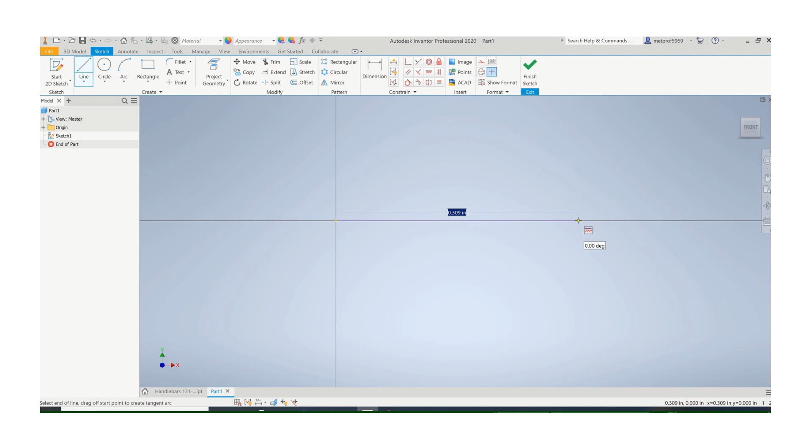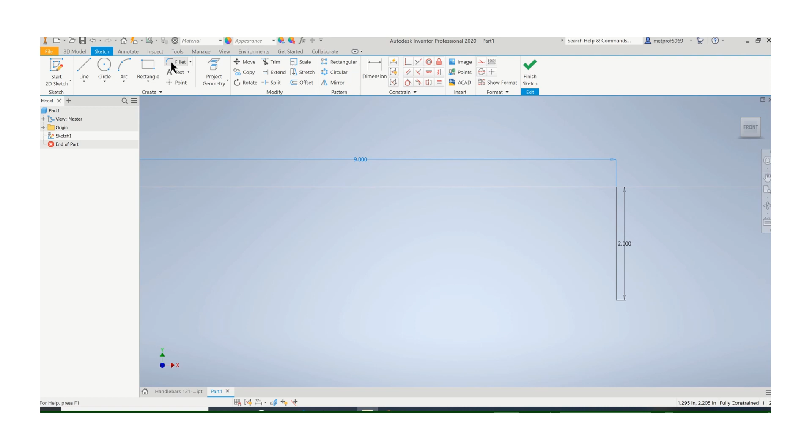And then I'm going to come out 2 inches, and I'll show you what I'm doing here. Let's get that out of the way. Now I've got a bend on this, so again, always put the bends on your path before you extrude it. And let's do a 1.5-inch radius on that.

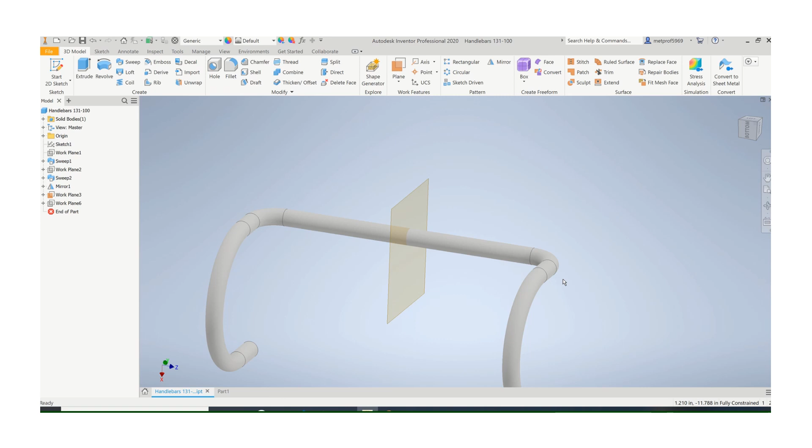Okay, so see what I have so far, and let me show you what I'm doing. Here's the center. I'm starting here at the midpoint because this is symmetrical, so I'm just going to draw one part. I'm going to come up here, go around this bend, and now this length right here, I can't do the full length because I want to do another sweep that comes around this curve.

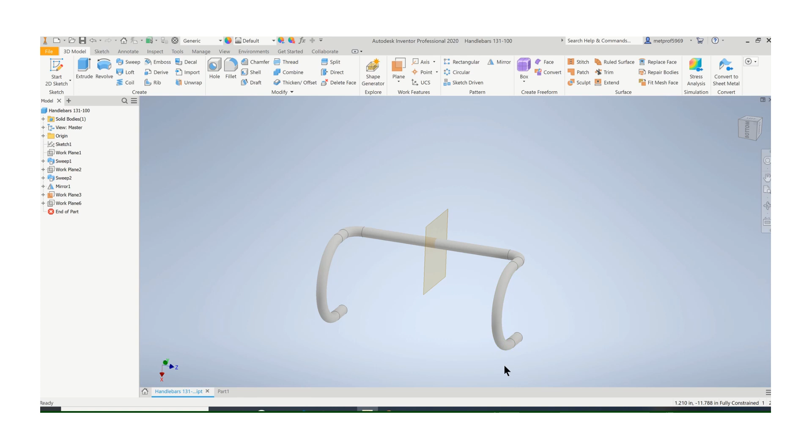Remember, you cannot start a sweep on the curve, so I'm going to just come part way through this straight section. Then on my next sketch, I'll do the rest of the straight section and then the curve. So I'm just going to stop right there, finish the sketch.

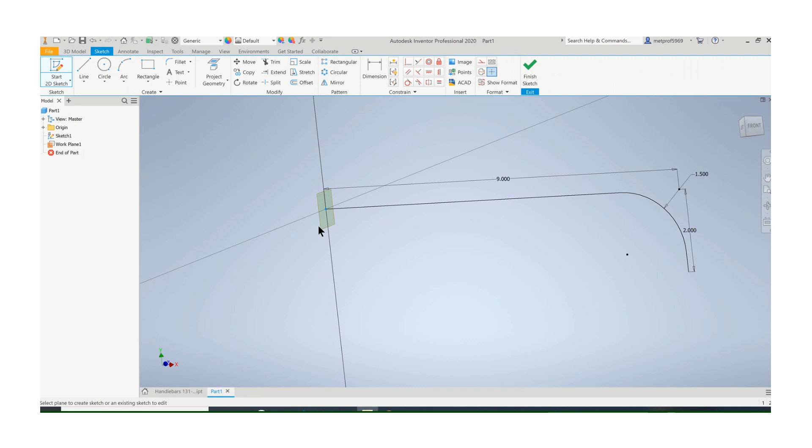Now I want to draw my cross section of the tubing. Again, I'll need a plane on the endpoint, so click on the endpoint and click on the path. And then we'll do a sketch on that plane right there.

And this will be my cross section of the tube, which is 1-inch OD, 0.875 inch ID.

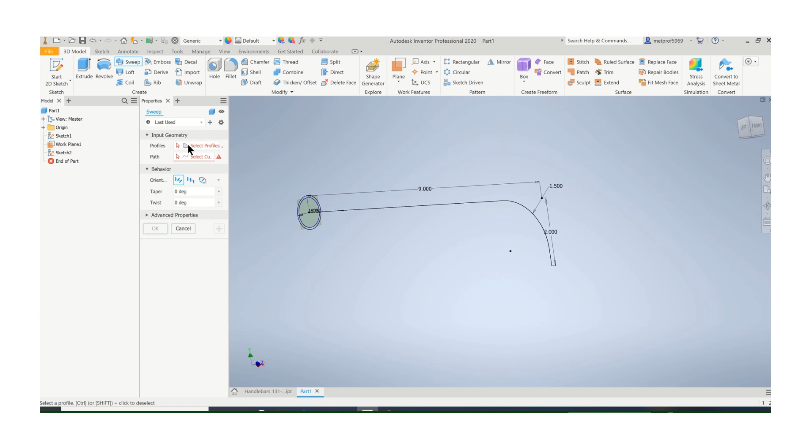And now we'll do a sweep. You just select the profile, which we've seen this before. It doesn't, sometimes it doesn't want to. There we go. Profile, and then click on the path. It'll sweep it.

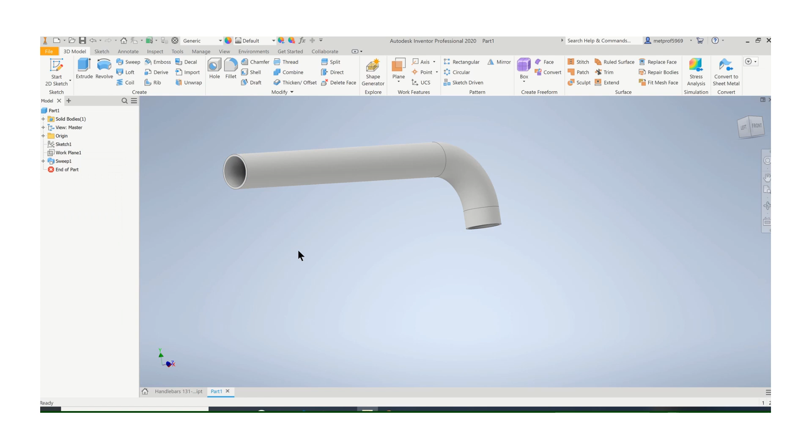So there's that part. Say okay. Now I want to go around the bend here. Let's hide that plane there. So I'm going to have a little straight section and then a curve, but it's in a different orientation.

So let's find a plane that we need. That's the one I need, except I need it offset over to there. So just do an offset plane. And I know that distance is 9 inches.

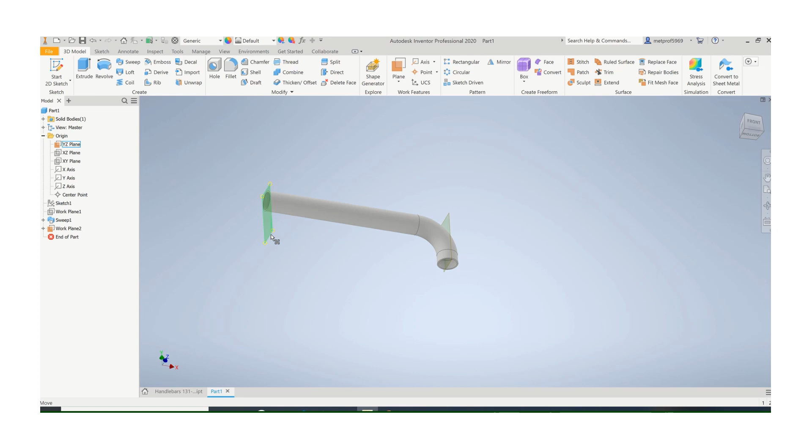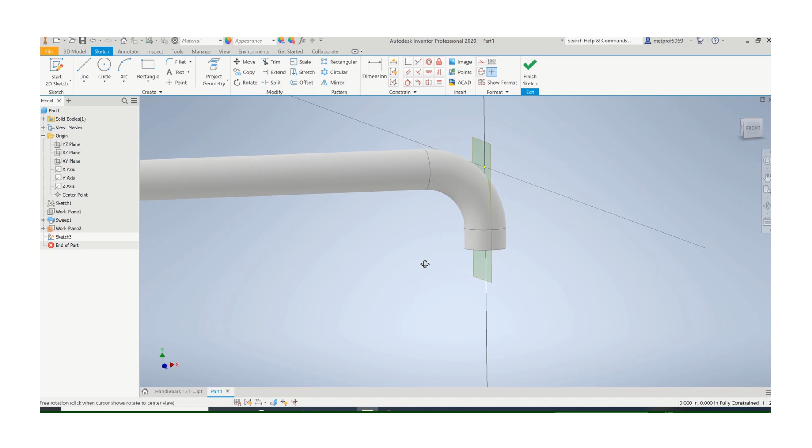So I want to make a sketch on there. Now if you want to make these planes bigger, you can always make them larger. Let's hide that one. And I'm going to make a new sketch on that plane there. Now let's make sure we got our orientation flipped around backwards, so I'm going to do this because I'd rather be on this side.

If I click on the square thing over, okay. So now I need to do a path. Now make sure you're on the center there so that everything's lined up.

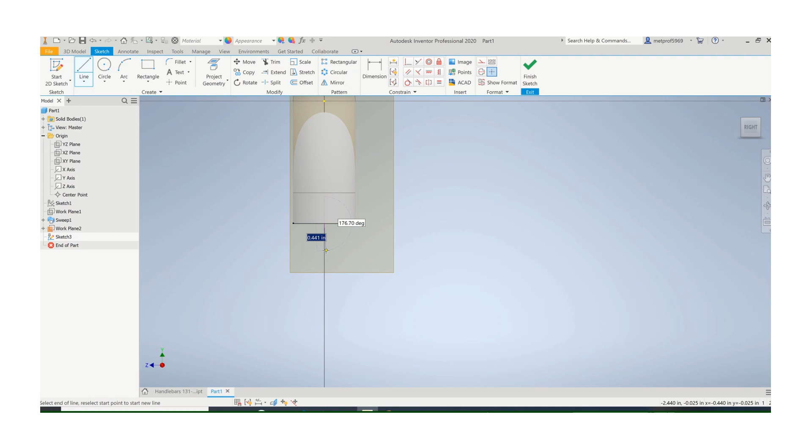You'll see it turn green. And I need to come down another inch. And then I'm going to have that curve, and the edge of the curve is going to be right there.

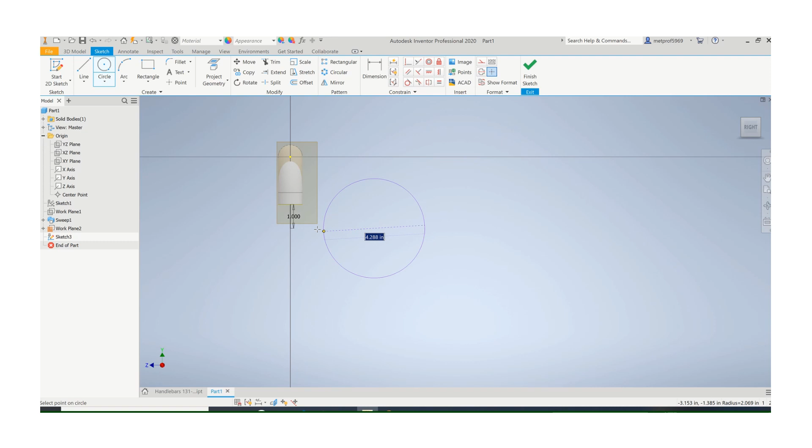So what you can do is just draw, let's see, find that end point and then come over, come straight over, and then just draw a circle. We don't care how big it is, and make sure it touches on that end point there. And then we'll dimension this circle. That's the easiest way to do that.

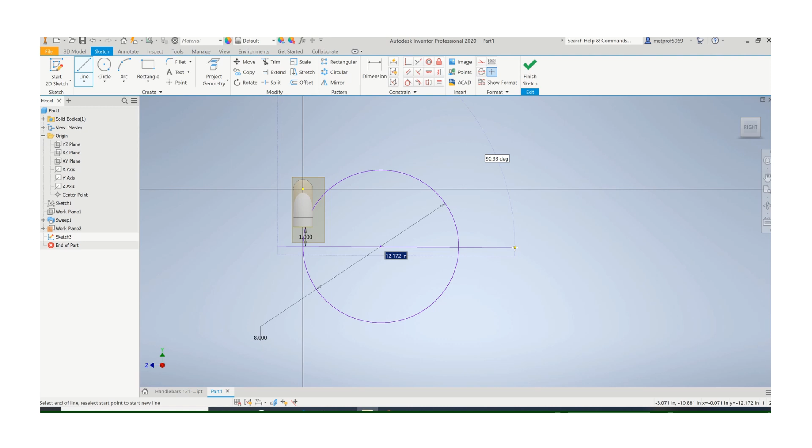And we know that that is an 8-inch diameter circle. And we also need, I'm going to trim this anyway, but I'm going to need a line across here as a trimming tool, but also as just kind of a reference. So easy enough just to, I say that, but let's make sure we get it.

Excuse me, let's make sure we get this on there. Make sure it's horizontal. Extend that over, okay. Because I also have then a straight section of the handlebar that comes off of this right here at the quadrant, and that's going to be a 2-inch long piece right there.

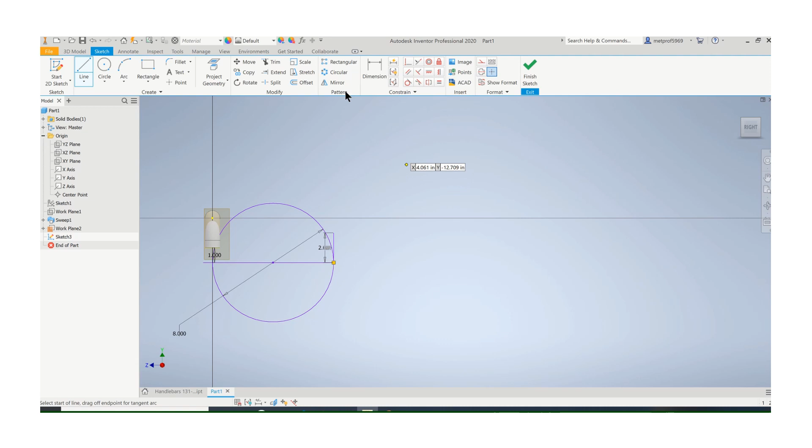And let's trim this away, get rid of those lines right there, and let's deal with that. There we go. I think we're good. Let's finish the sketch and see what we have.

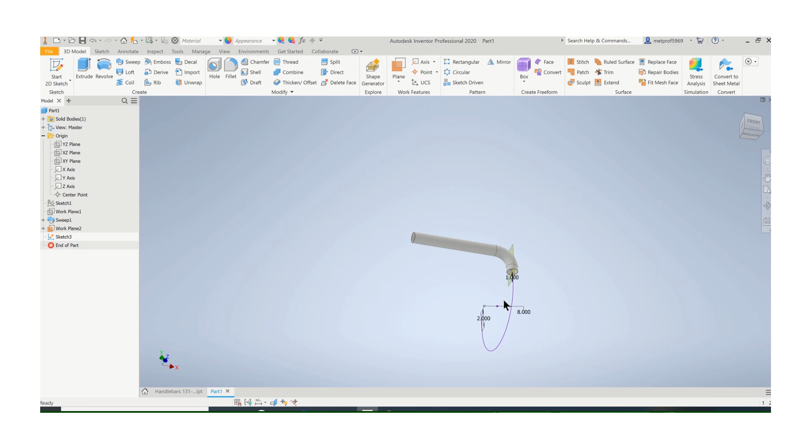So hopefully that makes sense to you. See how I've created that curve portion. Now again, I had to go a little bit of a straight section, so I just did a 1-inch straight section, then the curve, and then the other, that's the end of the handlebar that way.

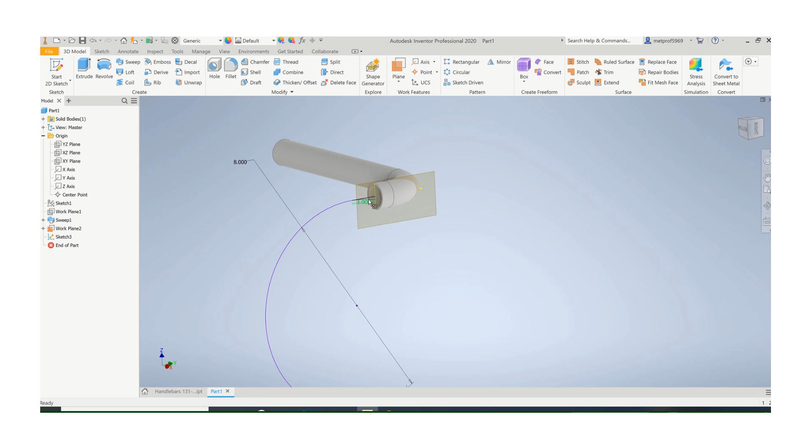Now I'll need to do the cross section of that to do the sweep. Now I can either draw it. Oh, I see that. That's why. Let's go back there. That's why that was still purple. I need to trim that little part of the curve off there. Still purple, but I think everything else is okay.

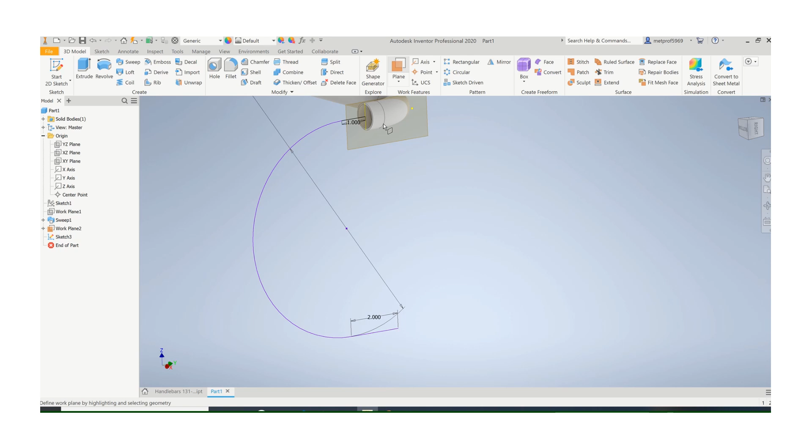All right, so I need the cross section to do the sweep. So let's just put a plane on the endpoint. Remember, click on the endpoint and then click on the path itself. That'll give you that plane on the end. We'll create a new sketch on there.

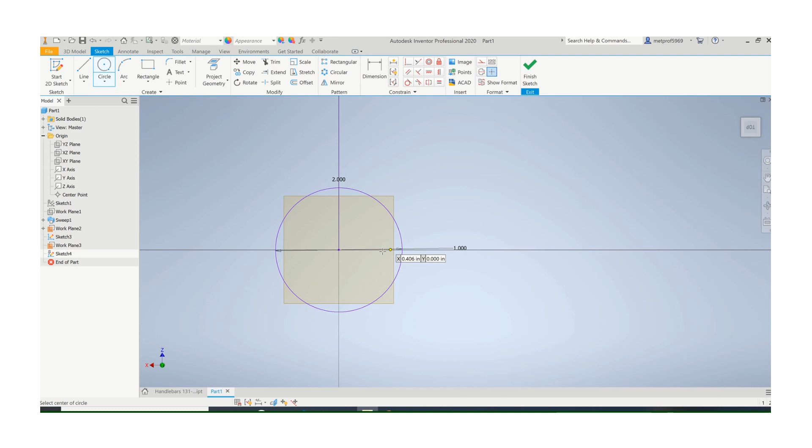And these are easy enough. They're just 2 concentric circles, 1-inch OD, 0.875 ID. Finish the sketch, and then I'll go to sweep.

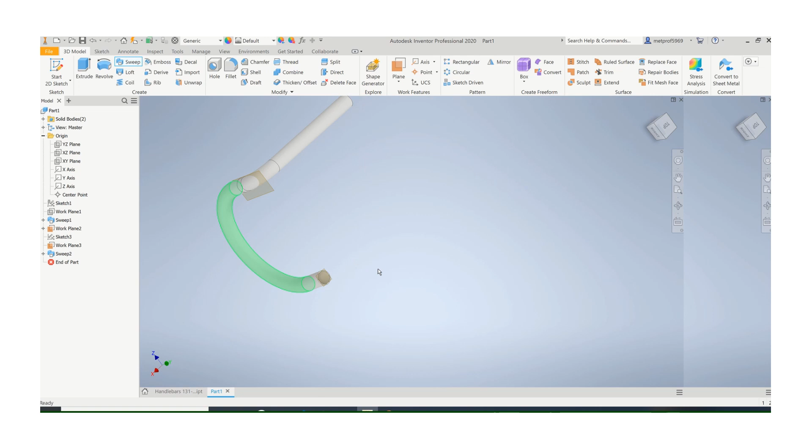Choose the cross section, and then choose the path, and it'll sweep it up to there. Don't worry about that message. Let's see what we've got. So let's hide those planes there. I don't need those anymore.

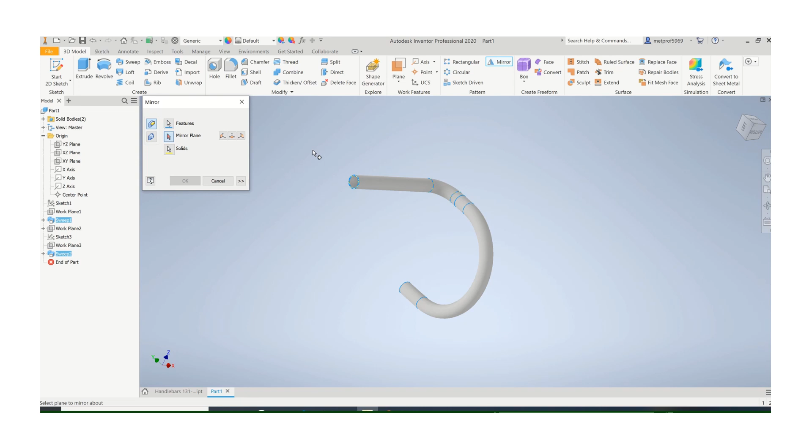So that's half my handlebar. Now I can use the mirror tool. For mirror, first select the features. Make sure you choose everything because I want to mirror everything here. And then go over here and choose mirror plane. Click on that face right there. You'll see all those little green marks are to kind of represent that. And there's my handlebars.

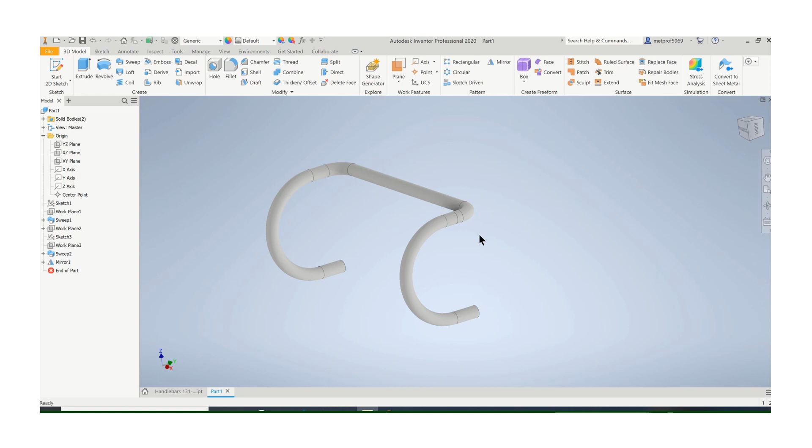Okay, so I showed you how to do it from this end back, and I showed you how to do it from the middle over. So whatever makes sense to you. Remember that you cannot start a sweep on a curve. The other thing, and I've talked about that before, you could draw this whole path and then sweep it. Sometimes it's very confusing working in that 3D space of what lines are what. Whatever works best for you. It's not that complicated to do it either way.